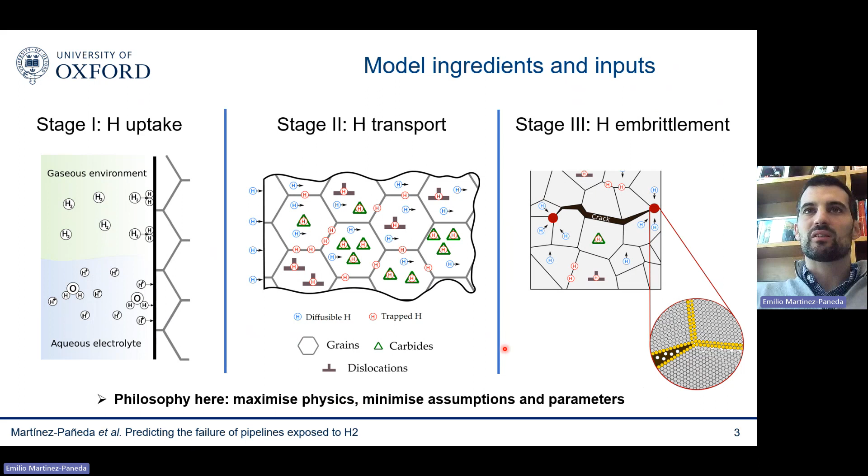So we want to minimize assumptions, and we want to minimize parameters. This is a fitting-parameter-free model—there are no fitting parameters involved here. So let me start with the hydrogen uptake stage.

Of course, I'm focusing here purely on the case of a gaseous environment. So for a hydrogen gas environment, where I know what my hydrogen pressure is, what is the amount of hydrogen that is coming into my metal? This is basically what I'm interested in.

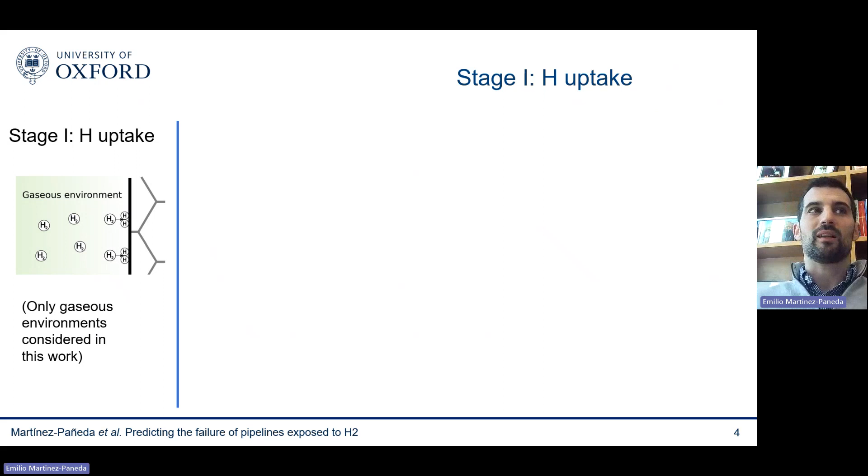I think the good news here is that we have a well-established equation for this, a closed-form solution, which is Sievert's law. You can see it here—it basically relates the hydrogen concentration, the lattice hydrogen concentration in the subsurface of the metal, to the pressure, or fugacity if you're dealing with very high pressures. But for the pressures we'll be discussing today, pressure is fine.

So this is an input—we know what the pressure of our gas is. This is the characteristic of the environment. This is what we want to obtain. And here is the solubility of the material, which is a material property that we can measure. The only thing to take into consideration is that this solubility is dependent on the hydrostatic stress, so you need some sort of finite element model to calculate the hydrostatic stress if you're interested in knowing what the hydrogen uptake is ahead of a defect.

But otherwise, it's pretty straightforward. But again, I must emphasize that this is not negligible, because normally we measure this solubility using a permeation experiment. And in a permeation experiment, of course, the tensile condition is an unloaded sample. So it's going to be very different to those ahead of cracks in a pipeline.

So that's important. But we know what is the contribution of the hydrostatic stress, sigma H. You can see here that it's an exponential term, so this is going to magnify the impact of this hydrostatic stress. And as you can see, it has basically the gas constant, temperature, and the partial molar volume. So this we know, partial molar volume of hydrogen is this number here, and then all the other parameters we know. And the hydrostatic stress comes from a finite element simulation.

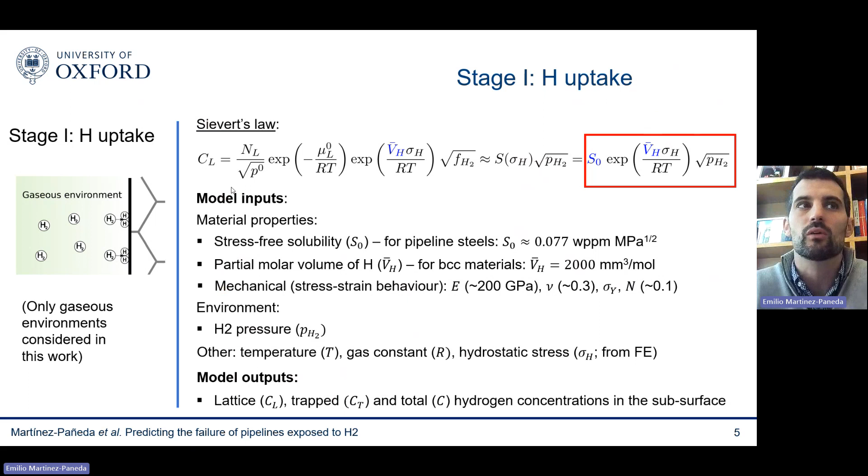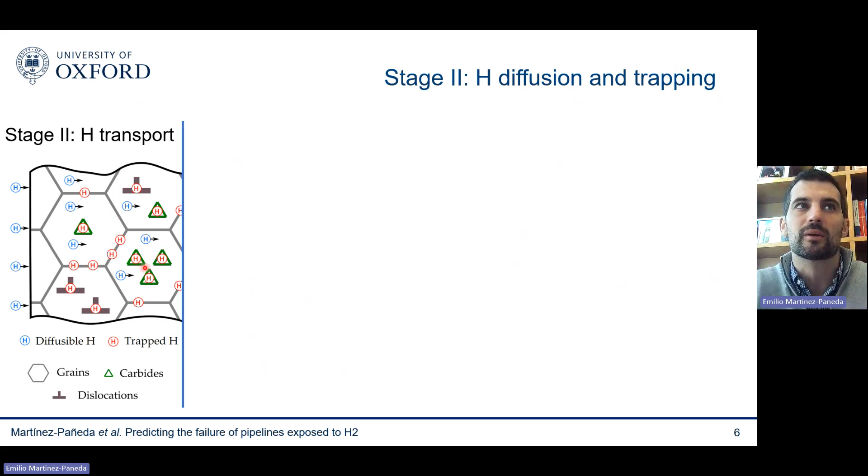Okay, so once you know how much hydrogen is coming into your metal, then you need to quantify the distribution of hydrogen within the pipeline, within your component, and also within your microstructure. Because hydrogen not only travels freely through the crystal lattice, as you can see here, but it's also trapped, sequestered at microstructural defects such as grain boundaries, dislocations, and carbides. So there's a couple of ways of doing this.

First, or one approach is to use effective diffusion models, which are based on an extended version of Fick's law. You can see here the concentration of hydrogen is driven by gradients of concentration and also by gradients of hydrostatic stress, again, a strong coupling with the mechanics part. And again, I'm highlighting in blue the material properties. As you can see, the only inputs the model needs are the diffusion coefficient, either lattice diffusion coefficient if you're modeling lattice diffusion, or the apparent or effective diffusion coefficient if you're looking at effective concentration, so diffusible hydrogen concentration.

Again, these are two parameters that are very well known. There's no uncertainty here. We know what is the value of all the inputs of the model before we run the simulation. So there's no calibration, no fitting. Everything is pretty clear from the beginning. And then, of course, the partial molar volume. I'm not going to discuss the quantities that I've discussed before. And, of course, gas constant and temperature.

And then we also need some boundary conditions, so some concentration of hydrogen in the subsurface, and that comes from the previous slide. So that comes from the gaseous hydrogen pressure and Sievert's law, and then the mechanical load. So whatever hydrostatic stresses you're applying, whatever load you're applying, that's going to result in a hydrostatic stress field. And then what do we get out of this model?

Well, we get a distribution in time and space of the lattice or diffusible hydrogen contents. And then you have another model, which is a multi-trap model, which you could base on Oriani or on McNabb-Foster. This is what you see based on Oriani, resolving the hydrogen distribution within the microstructural defects.

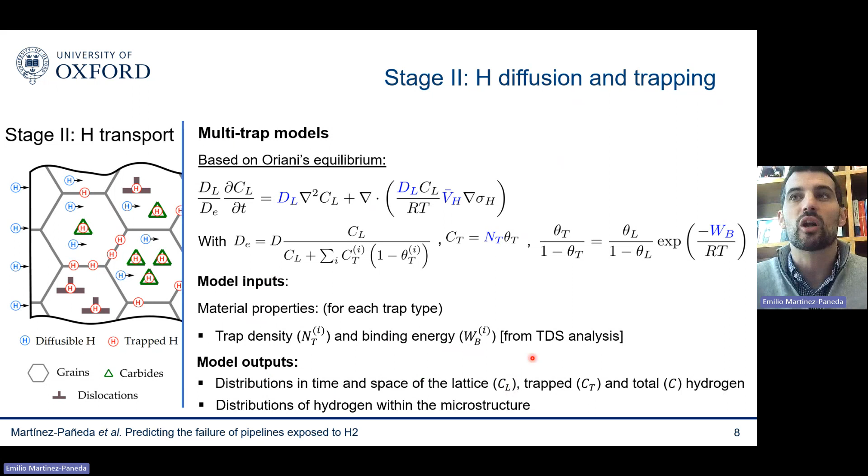We don't really care if the steady state is attained in 2 days or 2.5 days, and once you achieve the steady state, it's kind of the same distribution. But once you have these inputs into your material, once you consider this multi-trap model, you can quantify the distributions in time and space of the lattice, trap, and total hydrogen concentration, and also the distribution of hydrogen within the microstructure.

So this is a representative result. What you see here is a pipe that is being exposed progressively to a rising hydrogen pressure, pure hydrogen, and you can see how the hydrogen in the boundary increases, and you can also see how, as time goes by, the hydrogen distribution within the pipe changes.

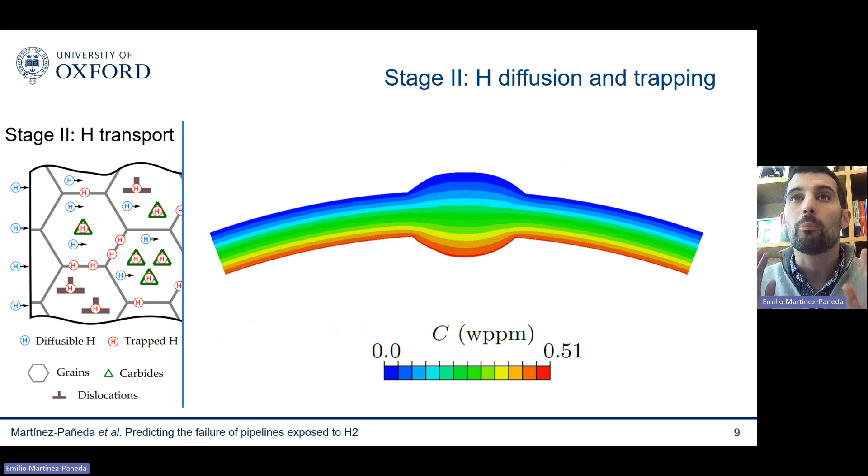So you see you have hydrogen coming in the inner part. This is a weld within the pipe, and then hydrogen equal to 0. The hydrogen is free to leave the outer surface, so you get this gradient in hydrogen concentration. This is the type of thing you can get with these models, relying only on parameters that are very well understood, that have a clear physical meaning, and that we can independently measure with experiments.

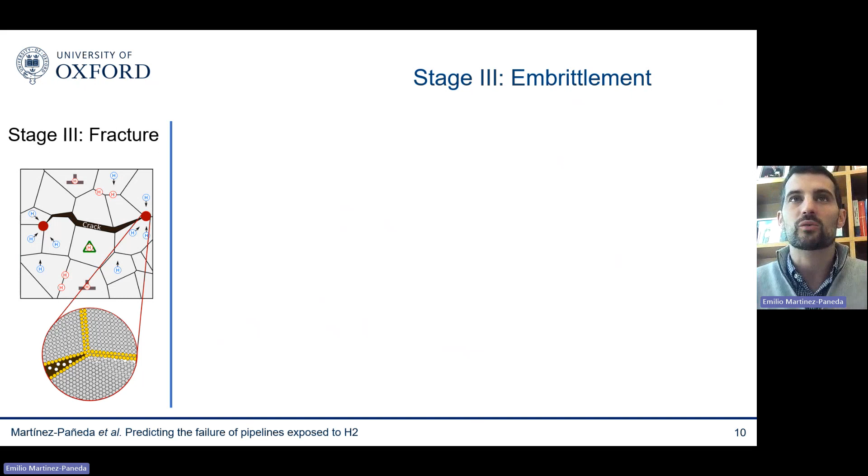That takes me to the embrittlement part. So now I know how much hydrogen I have, where and when. I need to predict when cracks will nucleate and grow. For that, what we use is the so-called phase field fracture models.

And we use this for two reasons. The first one is that they're computationally very robust. No matter what is the complexity of your cracking problem, whether you have 3D cracking problems, branching, coalescence, you can capture that without any convergence issues. So it's computationally very compelling.

But the other critical aspect is that it's physically sound, because it's based on the thermodynamics of fracture, basically a competition between the strain energy and the fracture energy. This is a balance that was first proposed by Griffith and then extended by Orowan to elastoplastic solids. And basically you see the governing equation here.

So it's a competition between the strain energy density, the stored energy in the material that increases with mechanical straining, and whenever the energy stored in your material is large enough that it can separate and create two new surfaces, then you overcome this fracture energy and you see cracks growing. So again, based on thermodynamics, on this balance between stored and fracture energy, and relying on something we know very well, the strain energy density, it evolves with mechanical straining, and this fracture energy is the material toughness that we can measure in fracture experiments.

I think the good point to emphasize is that because it's based on Griffith, because it's based on the thermodynamics of fracture, it is in very good agreement with well-established fracture mechanics theory. So you will see that in general, whenever we have homogeneous material under certain conditions, whenever we can, we should use fracture mechanics theory. It's well established, we know it delivers good agreement with experiments, and it underpins our design codes and standards. So it's good to have a tool that is in agreement with our standards, but I can also handle the more complicated scenarios where conventional or simple fracture mechanics models break down.

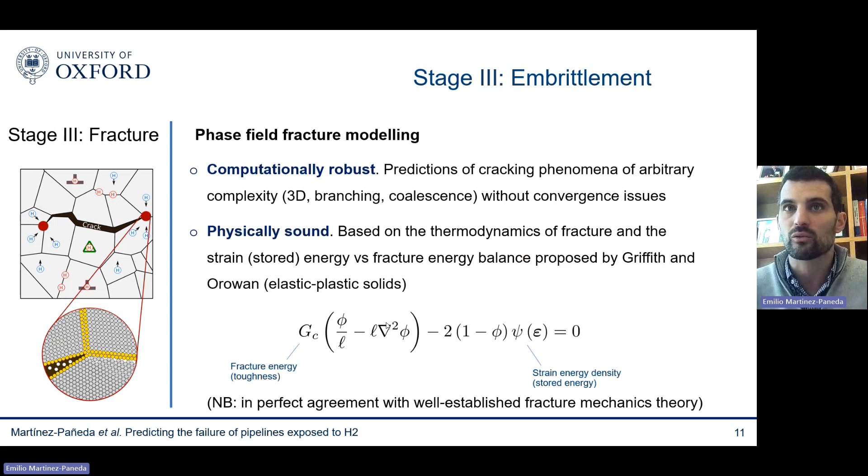You can see here that, because we have a length scale connected to the strength of the material, which I will discuss later, your model is also mesh independent. This is good because there are a lot of models out there which are mesh dependent, meaning one engineer sitting next to another is going to get different results using the same parameters. Here, as you can see, your response eventually, when your mesh is fine enough, H is the characteristic element length, you see that as you refine your mesh, eventually you get the same behavior. So your mesh has to be fine enough.

We see that an element size that is 7 to 8 times smaller than the length scale is all we need. Once you have that sufficiently fine mesh, you get the same result. And what you see is that this same result is precisely what you expect from fracture mechanics. This ratio approaches 1, which means cracking is initiating when your stress intensity factor is equal to your fracture toughness, or when your energy release rate is equal to your critical energy release rate.

As I said, the length scale also comes into play, and the length scale governs the strength of the material. There's a closed form expression for that, and therefore you are able to capture not only toughness dominated failures.

This is, by the way, failure stress versus crack size, and you can see that we capture this well-known concept in fracture mechanics of the transition flaw size that is widely used, for example, in standards such as R6. So you go from toughness dominated failures, where you can see a very good agreement with analytical predictions coming from linear elastic fracture mechanics, all the way to the situation where you get plastic collapse or strength dominated failures.

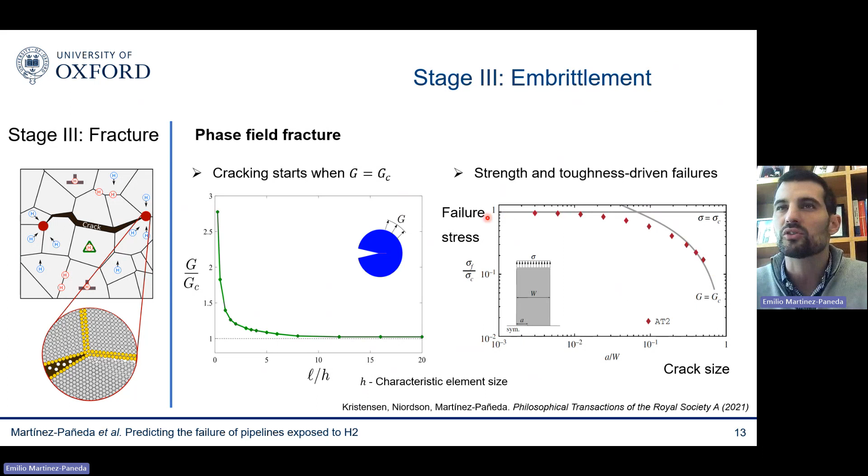So the model can naturally transition from one to the other because you're inputting the toughness and the strength of the material as inputs. And in fact, when you incorporate this, you can extend this model to fatigue.

You can see here that we can define a fatigue degradation function that is basically a function that degrades your fracture energy with accumulating load history. When you do that, you get this kind of S-N, or KT diagrams, that are well known in fatigue. So as an output of the model, you can quantify those KT diagrams. You can calculate for both finite and infinite life, for as many cycles as you wish, determine what these KT diagrams look like as an output of the model. So again, very good agreement with well-established fracture and fatigue mechanics.

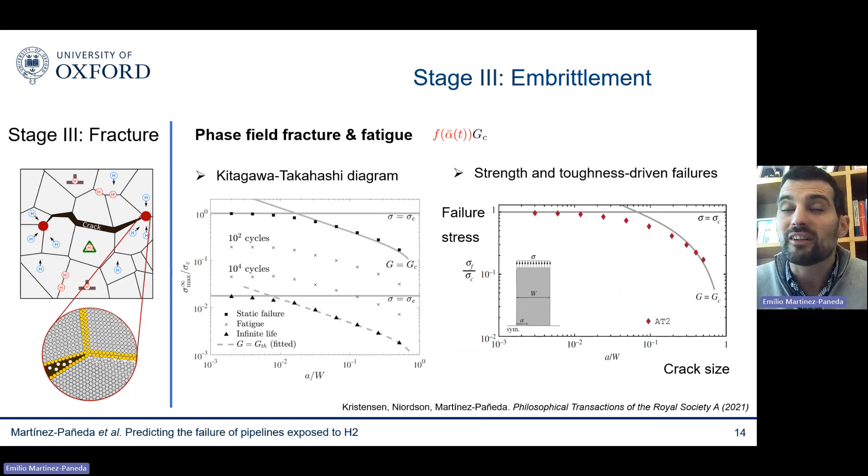This slide summarizes why these models have been so popular. These are all outcomes of simulations, some from our group, some from other groups. You can see that over a wide range of materials, here we're dealing with metals, ceramics, composites, even functionally graded materials, we can predict very nicely the output of experiments. And this is the output of very complicated experiments. You can see that not only can you capture very complicated cracking phenomena, crack branching, nucleation of secondary cracks, coalescence of multiple cracks, but we can also do so showing remarkable agreement with experiments.

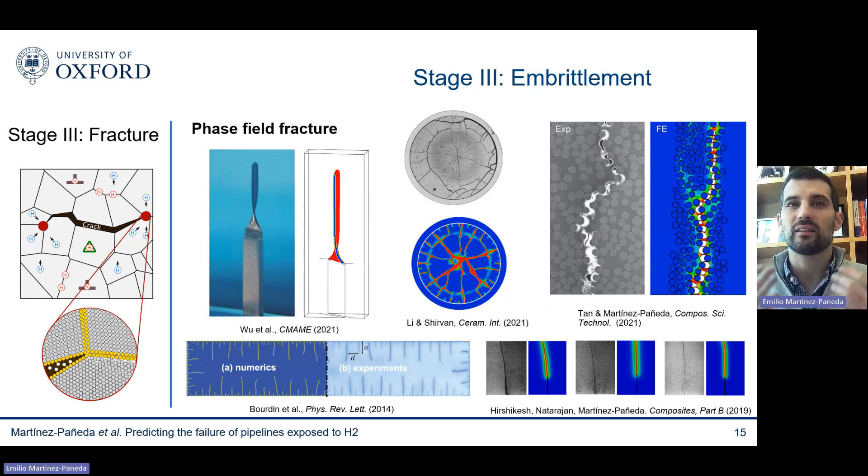So this is promising. The method is computationally very compelling. It is based on fracture mechanics, and it delivers very good agreement with experiments and with standards. That's convenient. And if you want to extend that to hydrogen embrittlement, then the only thing you need to do is model a three-field problem. This is the simplest one can do.

So it's an equation for the deformation of material, one for the hydrogen transport that I will discuss, and then one for the evolution of the damage in the phase field equation. And I'm highlighting here some of the couplings.

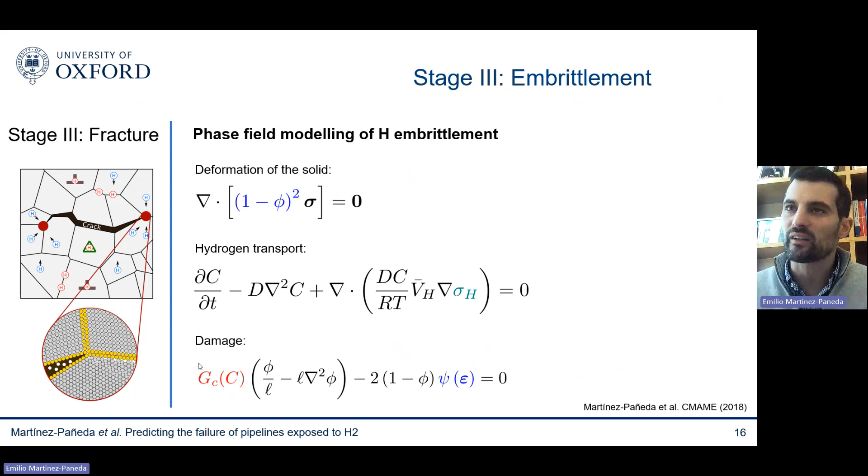The key coupling, of course, is how hydrogen interacts with the toughness of the material. We know qualitatively what happens: hydrogen reduces the fracture energy, but how to define this quantitatively is the key question. We have proposed two approaches for this.

Other groups have also built into our framework and proposed other approaches, but there's one more mechanistic, more academic, where you run atomistic calculations. These are DFT simulations run by the Sintef guys on two types of grain boundaries in nickel.

You can see that, for a given trap occupancy, so interface occupancy could be grain boundary occupancy, you can reduce quantitatively the fracture energy. If you take, for example, an Oriani model, then you're able to quantify what is the reduction of fracture energy.

But most often when we work with our industrial partners, we look for this phenomenological or empirical approach, because this is useful if you don't know anything about your material. Most often we're dealing, like here, with pipeline steels, where we have plenty of toughness versus hydrogen content data.

You can see here, toughness, fracture energy versus hydrogen content. There's plenty of data. This is from Sandia, I think. Most of the data is from Sandia, X80 and X52. So we can fit that data with a polynomial and introduce it directly into our model.

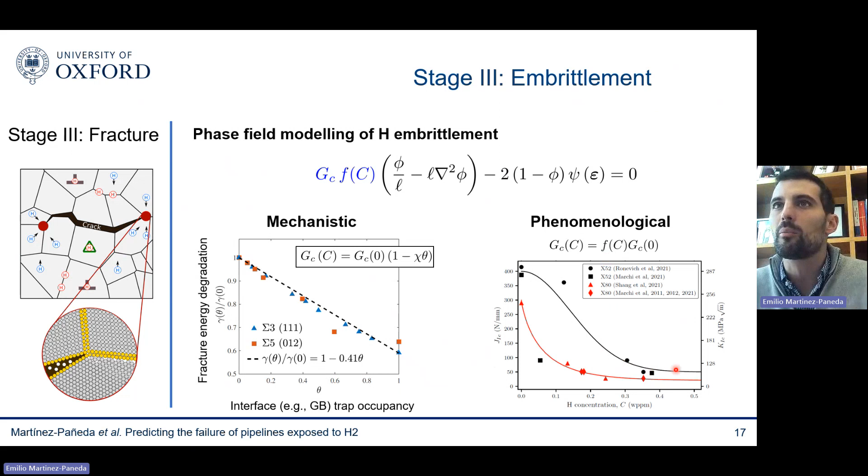So basically what this means is that at the end of the day, this model for embrittlement, the only input that comes in is the toughness of the material, which you can get from the fracture test. For example, for plane stress, we know that it's equal to the fracture toughness to the power of 2 divided by the Young's modulus. The fracture strength, which comes into play in the model for the length scale.

This is the closed form expression. So strength equals, as you can see, a function of Young's modulus, fracture energy, and length scale. And then we have this hydrogen degradation function, which can come from atomistics or from experiments on toughness versus hydrogen concentration. This is the case I'm going to focus on here today.

I'm going to remove all the assumptions. I want to have everything that relies purely on experiments and on physical parameters. So again, there's no calibration parameters, there's nothing that we can play with. We know all the inputs before we run the calculations.

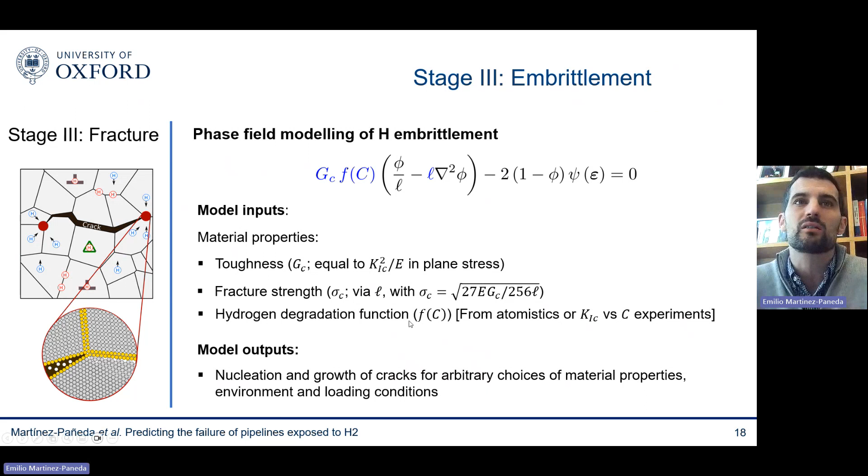And then what can we get out of these models? Well, the nucleation and growth of cracks for arbitrary choices of material properties, environment, and loading conditions. So let me show you some representative results showing how those models can blindly predict the outcome of experiments. And then we will focus on our problem at hand, the pipeline problem.

So you can see here a comparison with two pipeline steels. These are our crack growth resistance curves, the outcome of fracture experiments in air and in hydrogen. You can see this is an X80 and an X52 steel.

You can see that we get a very good agreement in terms of the J versus crack extension in both cases, for both materials. And again, with no fitting parameters whatsoever, there's no calibration here involved. You can see that we predict very well what's happening in air.

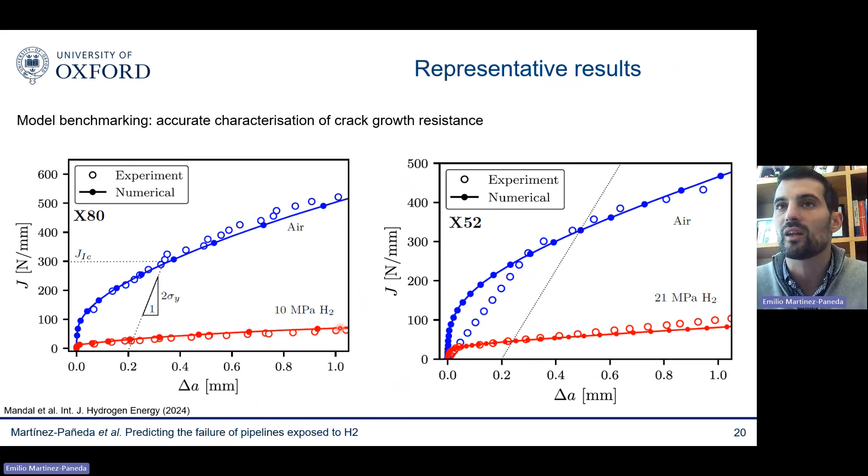And then we introduce hydrogen into our samples by using Sievert's law and putting an appropriate boundary condition, and we capture very nicely what comes out of it.

And we have also tested these models across a wide range of materials. This is a comparison for high-strength steels. This is for duplex stainless steels. So everything here, you can see that we get very good agreement with experiment.

These are pre-charged samples with notches. These are samples subjected to a constant load, where you can see that not only do we get good agreement, but we can also run virtual experiments over very large timescales.

And basically, you can do anything you want, right? So you can go down into the microstructure. This is, you can see a polycrystal. We can resolve the microstructure and rank different polycrystalline microstructures and compare the susceptibility to hydrogen.

These are cracks going through the microstructure. But you can also handle complex, large-scale problems. This is a classic screw failure test.

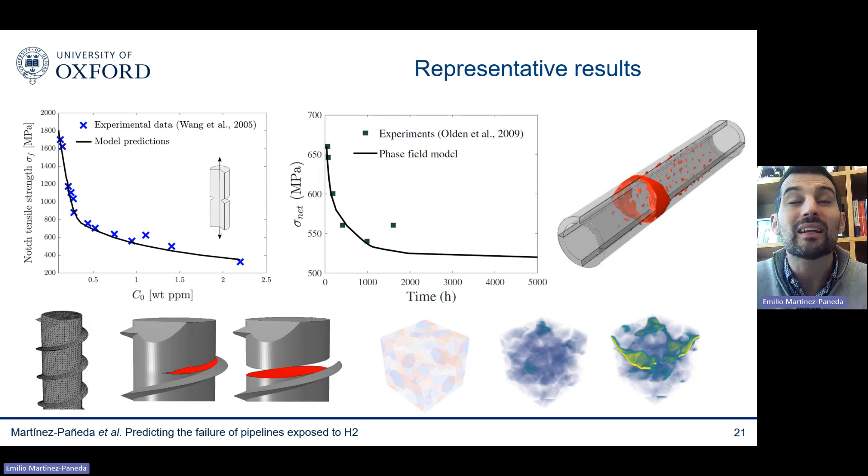Let me run this video. You can see here a very complicated problem. We have a pipe containing hundreds of defects due to pitting corrosion, and we can introduce those defects into the model and see how they're growing.

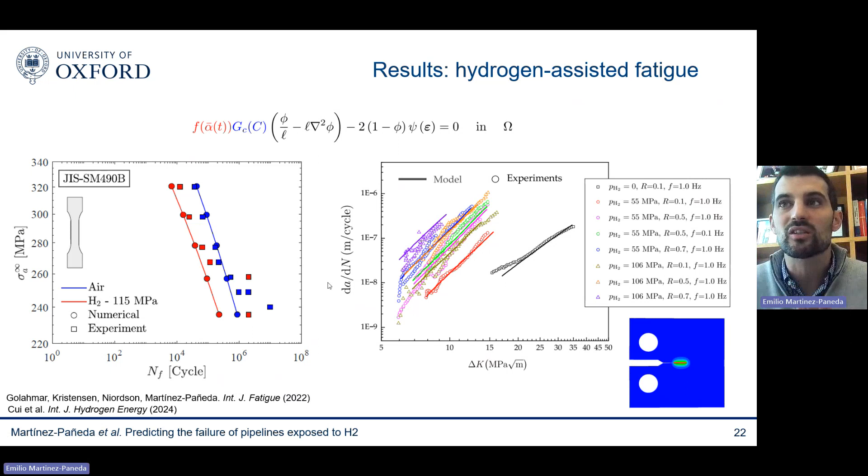More excitingly, we can also do things not only at the lab scale, but also at full scale. We can benchmark our model against full-scale samples. This is a comparison with full-scale fatigue tests done on pressure vessels, considering 2 types of alloys and 2 types of defects. As you can see, we get a remarkable agreement in terms of cycles to failure.

So we can simulate the pressure vessel in 3D and emulate exactly the conditions of the experiment. As you can see, we get very nice agreement in terms of the number of cycles to failure across materials and different notch geometries.

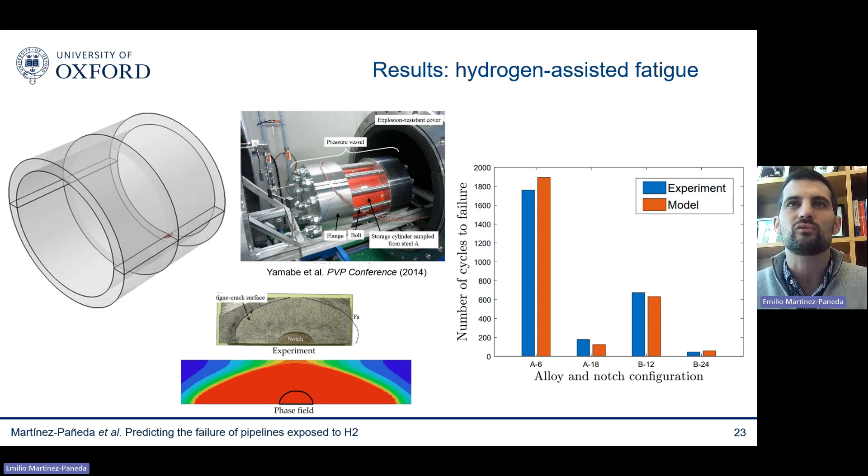I'm only going to be discussing fracture in the case of the pipelines, but the reason I'm showing fatigue is that if you have a model able to predict fatigue in both lab and full-scale tests, then predicting fracture is kind of a toy problem—it's really straightforward. Okay, let me get into the interesting part.

We've seen that the model is based on physical parameters that are well understood, that can be precisely measured in our labs, that have clear physical meaning and are known beforehand, so there's no calibration or uncertainty. We've seen this model delivers very good agreement with experiments across a wide range of materials, boundary value problems, fracture, fatigue, lab scale, and full scale.

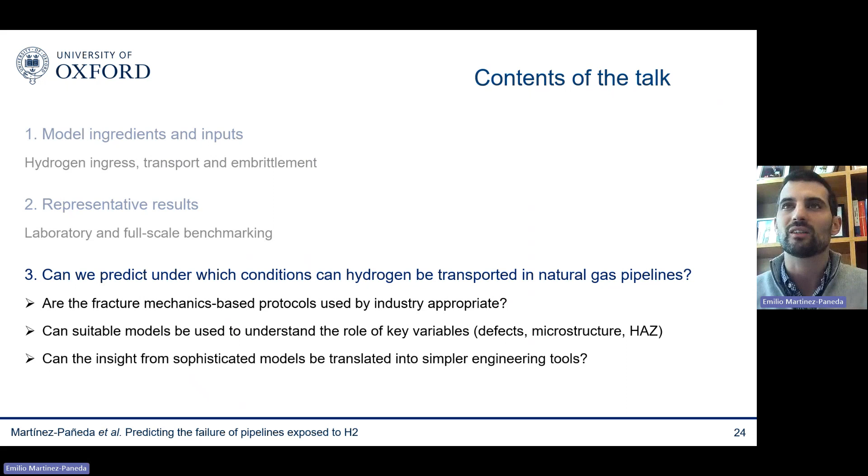So now the question is, we have these models that we trust—what can we learn about them when it comes to transporting hydrogen in natural gas? But before I get into this, let me discuss what industry is doing. How do we answer the question of whether existing natural gas pipelines can be used to transport hydrogen gas? This is a complicated question to answer.

Of course, first of all, the weakest link is clearly going to be the welds. A point I want to emphasize today is that we should always design based on the weakest link, the worst case scenario. We don't want to design based on the most frequent case, because that's not going to be the most challenging. We always need to understand very well what is the weakest, worst case scenario.

And the weakest link are going to be the welds. That's a problem because we are thinking about pipelines deployed over decades, since the 50s. So we have an almost infinite combination of pipe material, weld condition, pre-existing defects within the assets, residual stresses, and conditions we want to consider, like different hydrogen gas purities and different pressures. So it's quite difficult to test in lab scale all these combinations.

That's why I think models can be a key factor here. Again, welds are the weakest link, but they're very difficult to characterize. How do you introduce residual stress into your lab? How do you get sufficiently large samples along the heat-affected zone to do a proper fracture test to understand the fracture resistance of that heat-affected zone? There are multiple challenges associated with testing welds.

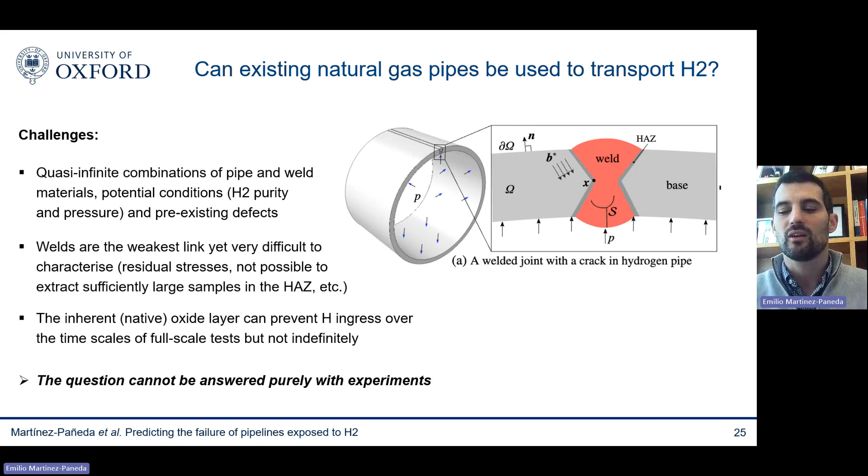So what is industry doing? This industry typically doesn't have access to this kind of sophisticated models. So what are the natural gas operators doing to assess whether their pipelines are ready to transport hydrogen? I think the best ones, the ones more engaged in research, are trying to solve this problem through a combination of spending a lot of money, gathering a lot of data, and using fracture mechanics, because fracture mechanics for homogeneous materials is rigorous and robust.

The problem with this is that you need a lot of data, because every time you change your mind about what hydrogen blend you want to try, or what hydrogen pressure you think you can handle, you need to run a very expensive experimental campaign, or run experiments in hydrogen gases where not everyone knows very well how to do their experiments properly, so there's some uncertainties in there.

And the other issue is that once you gather all this data, you have basically fracture toughness data. But what do you do with this fracture toughness data? Fracture toughness is something you measure in a homogeneous sample, but pipes, as you can see here, are not homogeneous. So the ideas of a K field, a stress intensity factor, a fracture toughness - those ideas of fracture mechanics work very well if you have a homogeneous sample.

But the moment you have a heterogeneous hydrogen distribution within your pipe, as you can see here, because we go from this region where you're exposing your pipe to hydrogen to this outer region where the hydrogen is free to leave the pipe - the moment you have this kind of heterogeneous distribution, because of the sensitivity of the fracture toughness to the hydrogen content, you have basically a heterogeneous distribution of fracture properties. And then you no longer can apply fracture mechanics.

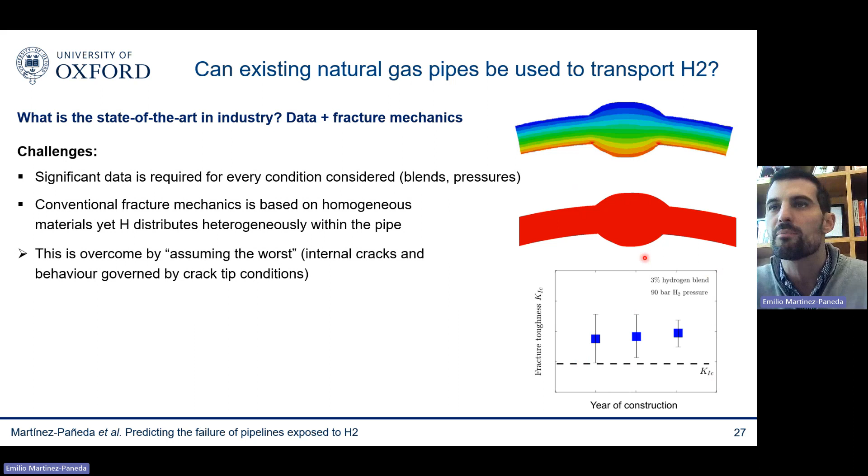It could be a 3% hydrogen blend and a 90 bar hydrogen pressure. Then they get all this data from those labs, and they say, okay, now I draw a line over here, and this is going to be my operating fracture toughness. So then I'm just going to compute my stress intensity factor and compare it to this fracture toughness.

And that's okay to a certain extent. I mean, I believe in fracture mechanics. It's true that it's to a certain extent conservative, although not too much, because it makes sense that inner cracks, in principle, one would imagine to be the most critical ones. And in principle, one would imagine that everything will be governed by crack tip conditions. So it makes sense that the condition that actually matters is not too far away from reality.

The problem lies here, basically: the welds. You have welds with very heterogeneous material behavior. You have a stress discontinuity, you have hard spots. And you can see this here, right? This is the hardness map provided by EPRI, our colleagues at EPRI. You can see very significant changes. You go from areas where you have a hardness of 140 to areas where you have a hardness above 240 Vickers hardness. These are significant differences - you're almost duplicating the hardness. And we know that hydrogen susceptibility is very sensitive to hardness.

So that's a problem. This approach is fine if you have a homogeneous material, but you don't have a homogeneous material here. So this is a challenge. It's also a challenge not only because you don't have a homogeneous material, but also because, as you see, you have basically a composite - you have jumps between heterogeneous material. That's going to create rises in the stresses, that's going to create hard spots. So that's going to be quite challenging. Not only do you need to understand these materials individually, but you need to understand how they behave together.

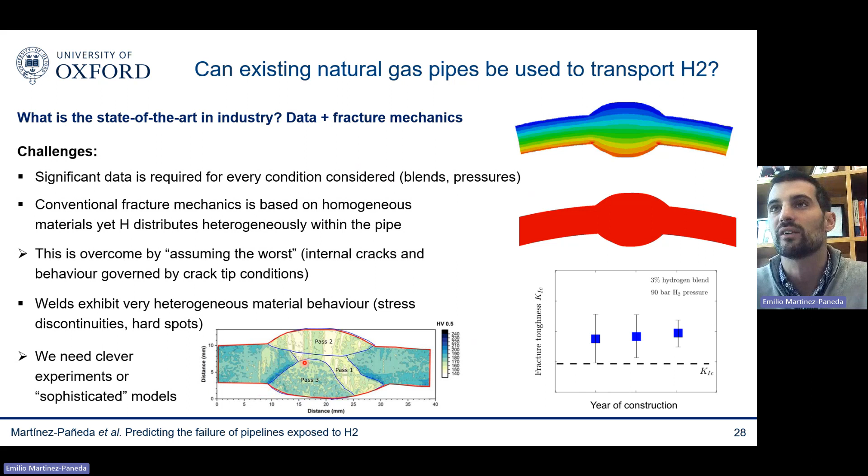And again, let me emphasize, the problem that industry is approaching is that this works well when you have a homogeneous material. This works well if you're looking at the integrity of your base material - if you do this approach for the base material, then you're safe. But the problem is that the welds are going to fail before the base material, and this does not work in welds because, again, you have heterogeneous material behavior, and you're not able to characterize what is the fracture toughness of the heat-affected zone. So that's the challenge, and we hope to overcome it by using this sophisticated model, so to say.

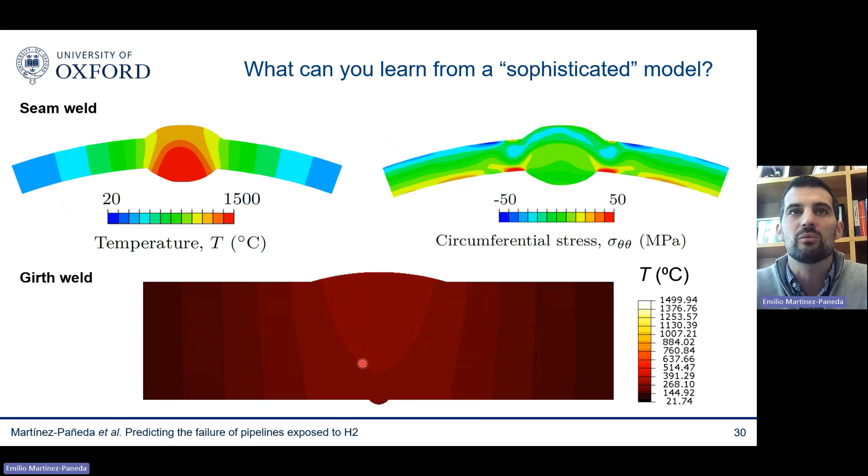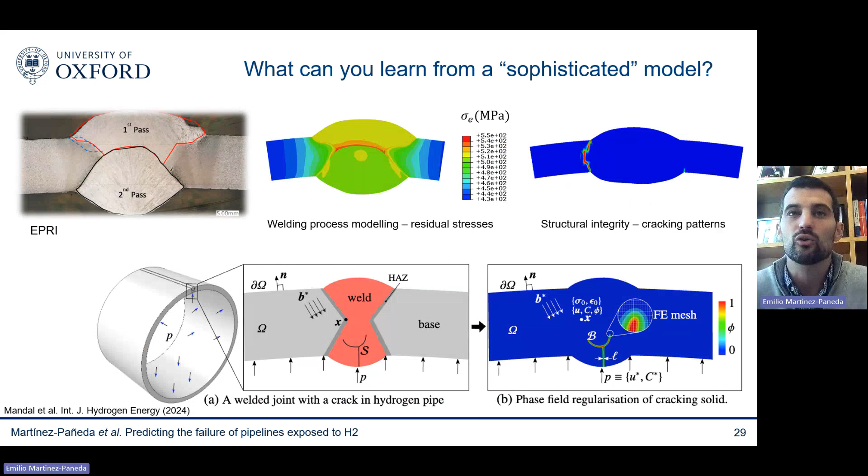So you have a simulation where you do the weld process modeling, and then you use the model I showed you before to predict the critical pressure at which the pipe will fail. This is the welding process simulation. There's an entire community devoted to welding process modeling, and they have very sophisticated tools that can do these things quite precisely. You can see here the simulation for a two-pass seam weld, and here for a multiple-pass girth weld. You simulate the welding process, and then you get a distribution of residual stresses, and a distribution of the different phases involved in your material. We've seen that those phase distributions can be correlated to hardness, giving very good agreement with the hardness maps shown before.

Once you have your residual stress distribution and your material property distribution, you expose your pipeline to a rising hydrogen pressure. You can see the hydrogen increasing, and eventually, when you reach a critical hydrogen pressure, you will see a crack grows.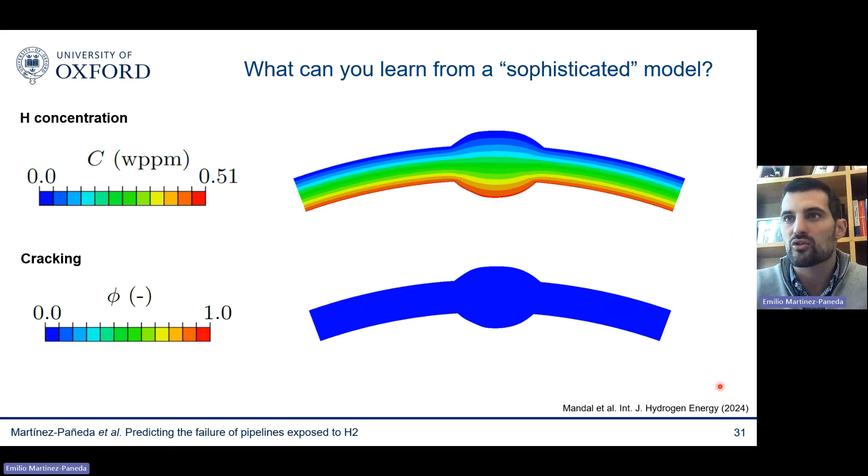So you can quantify the critical hydrogen pressure at which your pipeline failed. We did this and published a paper on it in the International Journal of Hydrogen Energy earlier this year, where we conducted multiple studies to systematically understand the effect of residual stresses, porosity in the weld, and mostly pre-existing defects. We found that a flaw 3 millimeters long, aligned in the heat affected zone, can deliver a critical failure pressure of 15 megapascals, which is not too far from large-scale tests done under similar conditions.

This is problematic because these are some of the pressures discussed for transporting hydrogen, and we know this type of flaw exists in natural gas pipelines. You can also test the role of microstructural heterogeneity, and we see a very significant reduction in critical pressure. This matters—it has been neglected, but it matters quite a lot.

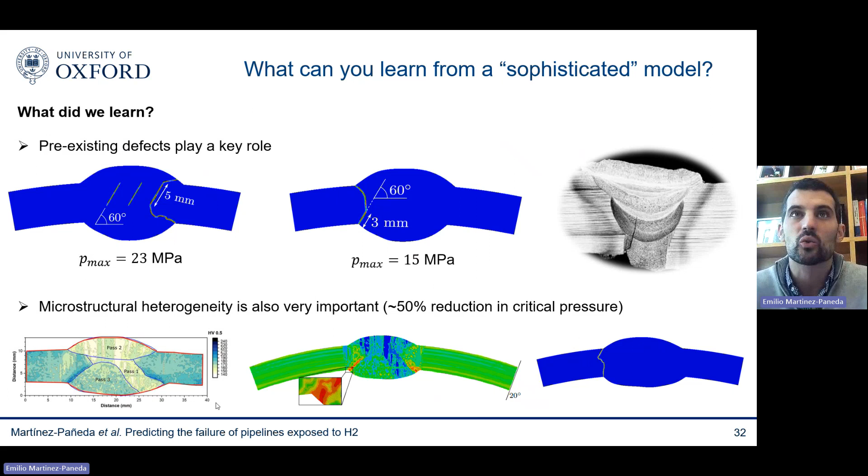The other thing you can do is consider the conditions of the standard. The standard tells you under which conditions a weld was considered satisfactory—for example, you're allowed a lack of fusion defect below 4 millimeters, certain imperfections, lack of penetration defects, root contraction, porosity conditions, undercutting. You can introduce all of those conditions, and even assuming the weld was done perfectly in agreement with the standard, you can quantify the effect of each defect on reducing the critical pressure of your pipeline.

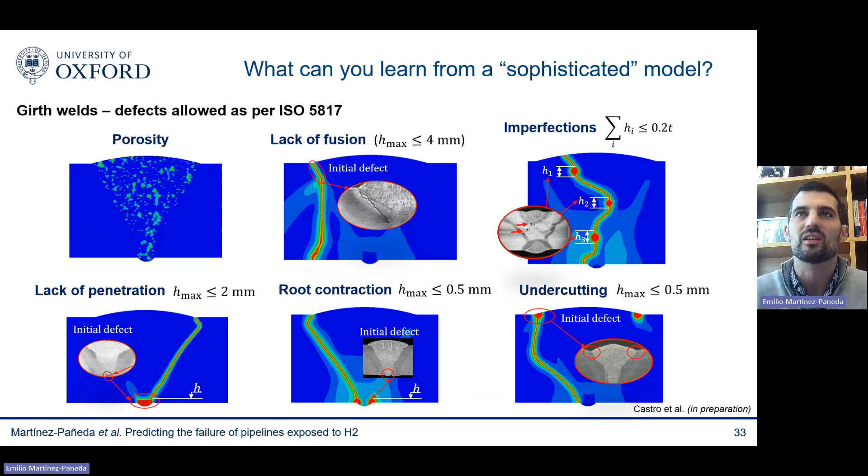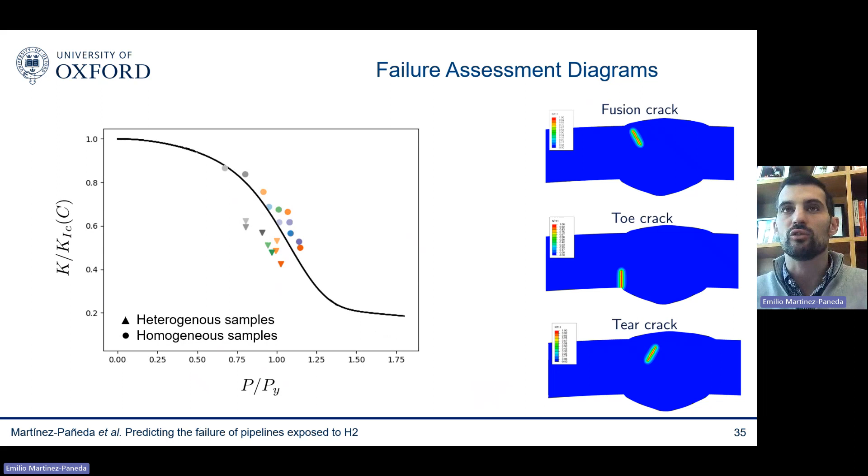This is some of the work that we're doing with EPRI. And then you can draw a new line here and quantify what is the safety factor that you need to apply to your standard fracture mechanics assessment, because you are not considering these heterogeneous properties.

So just to finish, I'll summarize by saying the only inputs that come into the model are the ones that you're seeing here. All are very well known and understood. I mean, if we don't understand these inputs, we cannot really work with standards, because what do we have here? Fracture toughness, Young's modulus, Poisson ratio. We cannot quantify stress intensity factors if we don't know these numbers.

So all of these parameters we know beforehand. There's no need for recalibrating them. We're not fitting anything. All of them are blind predictions.

So in the mechanical side of things, we know we need Young's modulus, Poisson ratio, yield stress, strain hardening exponent—basically a uniaxial stress-strain curve. From the fracture perspective, we need the toughness, we need the strength, and we need the degradation.

How the fracture toughness degrades with hydrogen concentration, the hydrogen degradation function—basically, fracture tests at different hydrogen concentrations. Then we need the stress-free solubility, which you can get from a permeation experiment, and the partial molar volume.

This is well known. The diffusion coefficient could be lattice or apparent diffusion coefficient. Optionally, if you want to resolve the traps, trap binding energy and density—these don't matter much in this application—and we can get them from TDS analysis. And then, of course, you need other things like the pressure from the environment and the temperature.

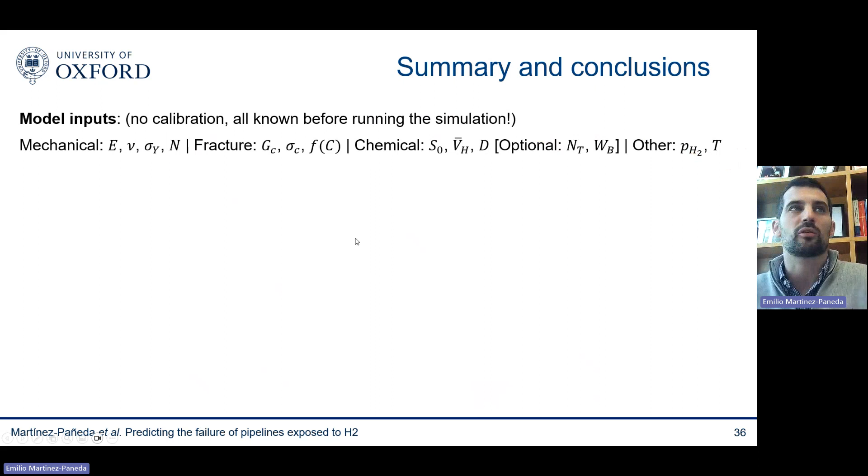But once you have these inputs, which are very well known, you basically have a physically based and parameter-free model based on these phase field methods that can not only answer technological and fundamental questions related to hydrogen uptake, transport, and embrittlement, but very precisely predict hydrogen-assisted fracture and fatigue, which is much more complicated in both lab and real-scale components.

And when we apply these to pipelines, what we see is that we can quantify precisely under what conditions we can safely transport hydrogen natural gas pipelines. And this we can do through dedicated, cheap, and efficient virtual tests.

So we can run experiments under different combinations of defects, of residual stresses, of weld and pipe materials, weld conditions. So we can try to understand what happens, for example, for external defects, internal defects. We can answer those questions, and we can use these tools to guide inspections, but we can also use these tools to come up with appropriate safety factors and failure assessment diagrams.

And we have shown that the approach that industry is doing is very dangerous, because they are focusing on the most common scenario, but one has to design based on the worst case scenario, which is accounting for this heterogeneous distribution of the welds.

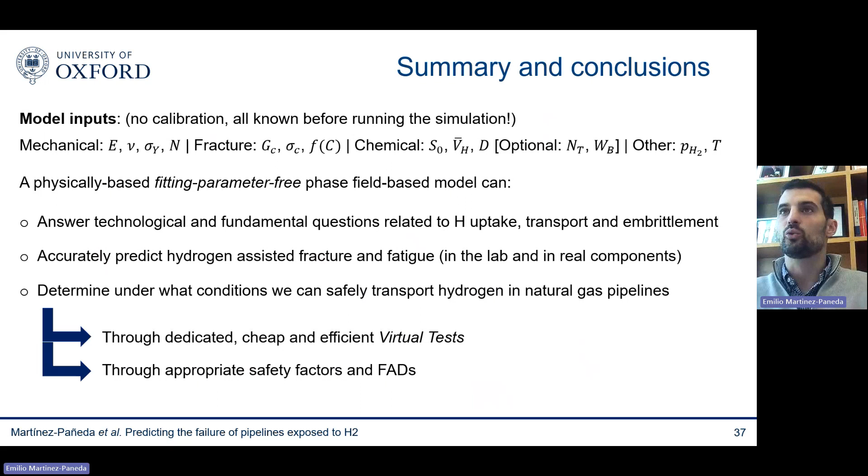And this is critical. Until we find a way of characterizing those heat-affected zones that we know are harder, more brittle, and much more susceptible to hydrogen embrittlement, we don't have a valid tool. So these tools can overcome this gap. These tools can help you quantify what is your safety factor in those problems.

And that's all. I thank you all very much for your attention. I hope this was of interest.